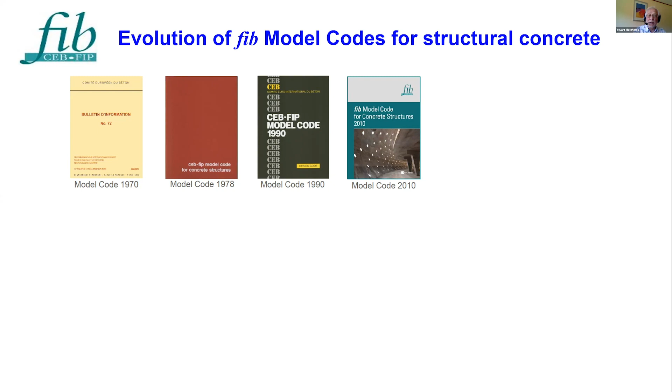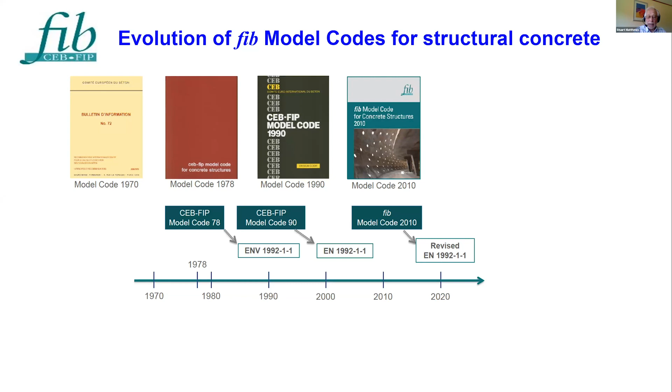Looking backwards, there are 4 previous codes, one from 1970, 78, 1990, and 2010 being the current code. These codes have had an influence upon the development of Eurocode 2 and also upon the development of Asian and African model codes.

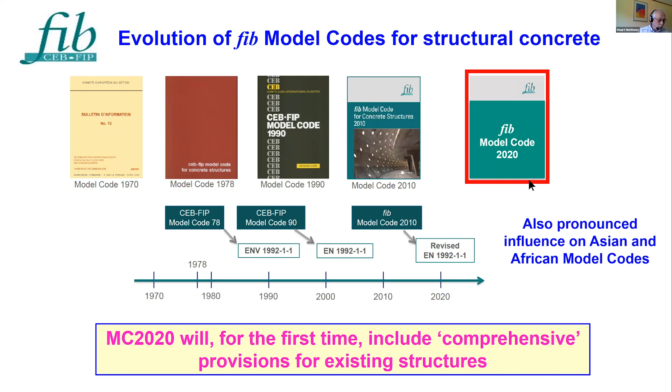But what we're moving on to now is, as you've heard, Model Code 2020, and this will be for the first time including comprehensive provisions for dealing with existing structures.

But before we embark on that, I thought I'd just say a few words about what a model code is. It's a synthesis of international research and industry materials knowledge and expertise. So it's a pre-normative document, but it's an important step in the process of converting such knowledge into practical guidance for the design of new structures and also the life cycle management of existing ones.

So what we're doing is bringing advanced knowledge to industry practitioners and making it available also for national and international code writers. So our goal with Model Code 2020 is to bring together coherent knowledge and experience for both design of new structures and the life cycle management of existing ones.

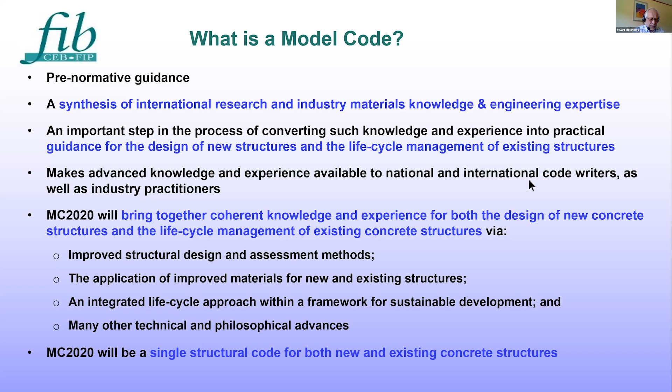This involves improved structural design and assessment methodologies, the application of improved materials for new and existing structures, and we'll talk more about that as we go through, but importantly, adopting an integrated life cycle approach within the framework of sustainable development. But those are just a few headline points.

So I'll give some background on that, but I'll also seek to draw out to illustrate some aspects of the innovations in Model Code 2020. But again, these are quite selective and there are many other things I can't talk about today. This presentation contains many additional hidden slides which I can't show because of time constraints, but will be useful if you wish to review, get more detail on many things that I talk about.

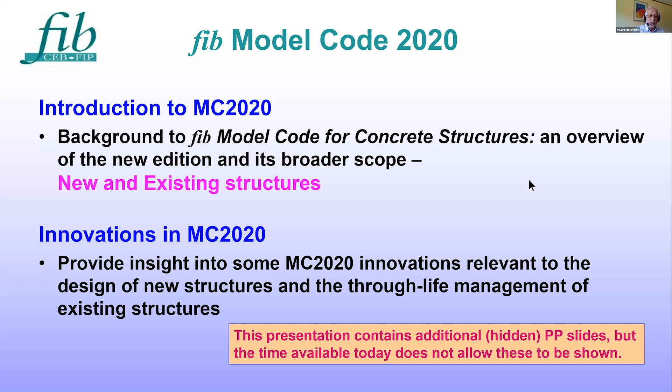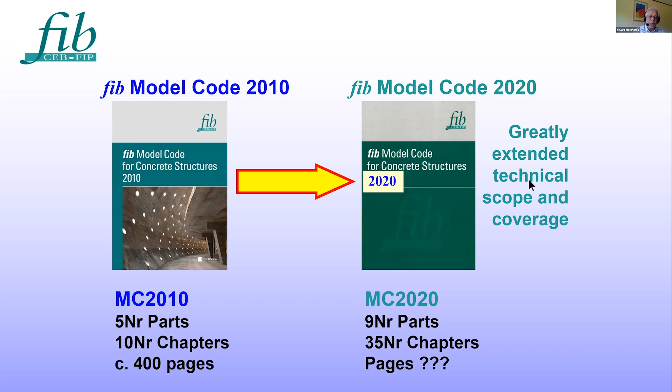So our starting position was Model Code 2010, and we're seeking to move across to 2020. 2010 was in 5 parts, 10 chapters and about 400 pages long. Model Code 2020 is in 9 parts, 35 chapters are envisaged. We don't know the page count at the moment, but it has a greatly extended length because of the vastly increased technical scope from technical developments, but also dealing with both new and existing structures, i.e. the portfolio of concrete structures which exist.

There will be suites of fib bulletins to provide additional supporting information which enables the authors of those areas to go into more technical detail, but also to help us reduce the page count of the main Model Code 2020 document.

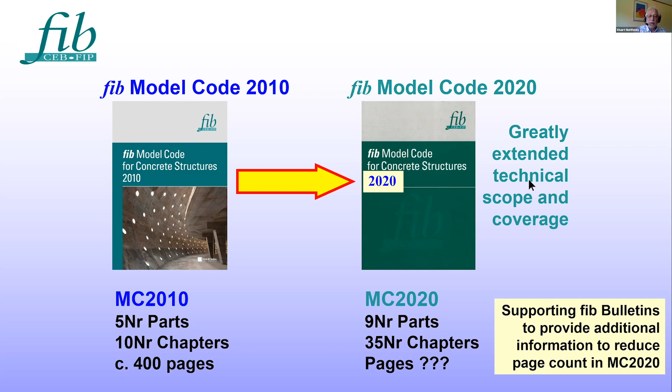An important and significant aspect of the framework is sustainable design. It's becoming an increasingly important issue for us all. Clearly, we're looking to have an ability to design buildings and construct assets with low or perhaps no carbon impact. We're looking for improvements in the efficiency of material usage and structural forms, delivering such advances. We must conserve and reuse existing buildings and extend the useful life of assets where possible. And those activities require an understanding of old materials, existing materials in currently present concrete structures.

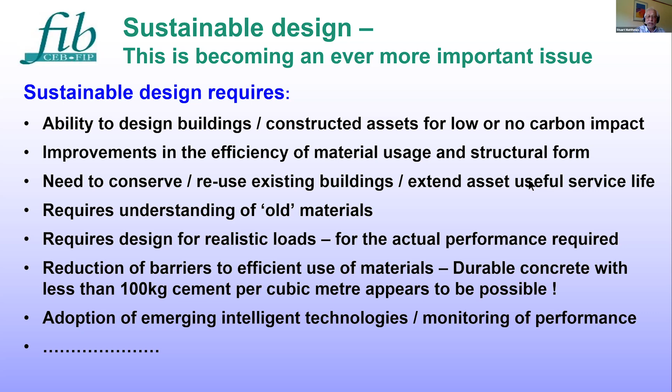We need to design for more realistic loads, so focusing upon the actual performance requirements. And also one of our objectives is to try and reduce barriers to the efficient use of materials. Durable concrete can be made with less than 100 kg of cement per cubic metre. One of our other goals is the adoption of emerging intelligent technologies and getting feedback on the performance of structures through monitoring through life.

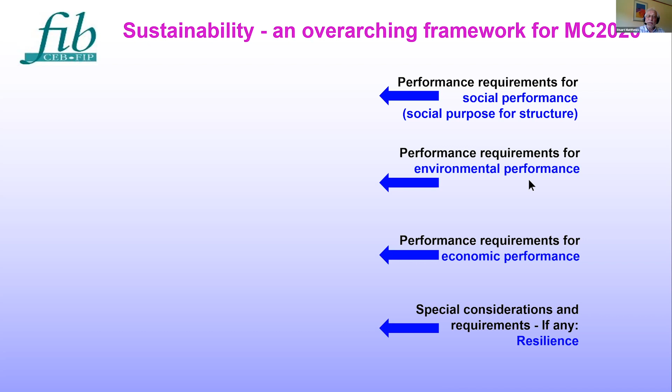Sustainability is an overarching framework within which Model Code 2020 is being built. You've heard a little bit about this from the preceding speaker, but we have the three pillars of sustainability: social, environmental performance, economic performance, but also there may be some special considerations in particular circumstances, such as a greater emphasis upon the resilience of the performance of the structure.

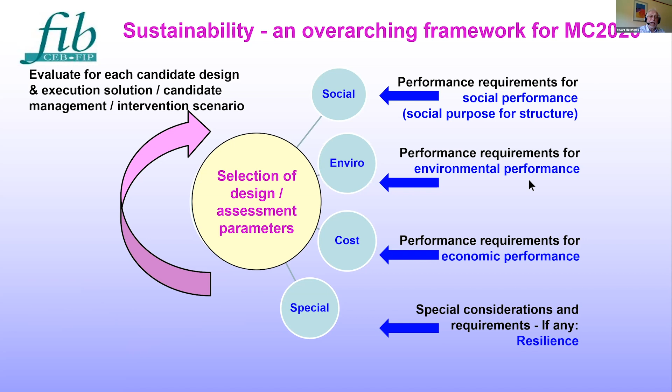So that gives us a series of performance requirements which enable us to select design and assessment parameters which guide our development of candidate design and execution solutions for new build, or candidate management intervention scenarios for existing or adaptive buildings.

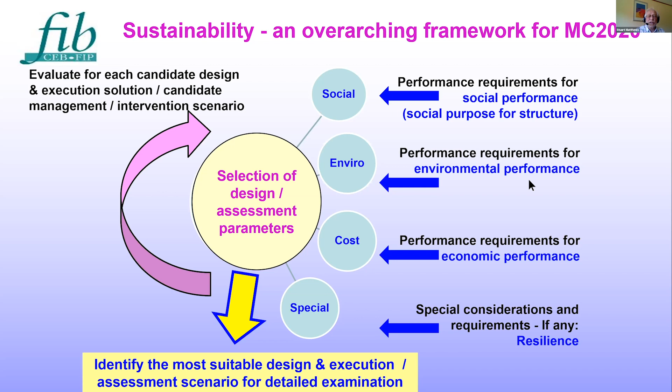That process will help us identify the most suitable scenarios, most suitable options for detailed examination, pretty similar to the way that conceptual design evolves possible alternatives for a design solution.

In terms of conceptual scope for Model Code 2020, we're dealing with new structures, existing structures, but also the interaction between these in terms of adaptation, new structural members as parts of existing structures, retrofitting, and those types of activities.

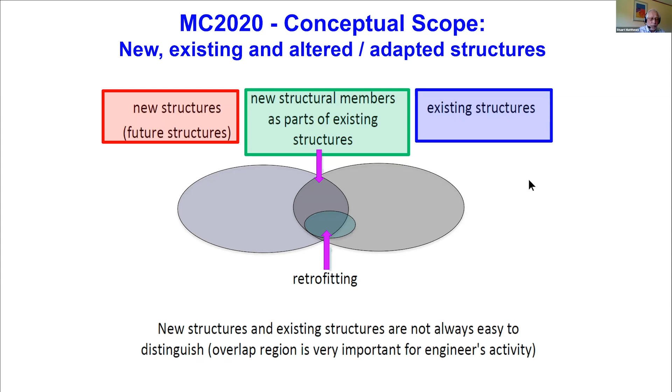I'll just briefly touch upon the table of contents. Today, I'll only itemize the main parts of Model Code 2020. The presentation contains additional slides listing the 35 individual chapter headings, but I don't really have time to go into that today.

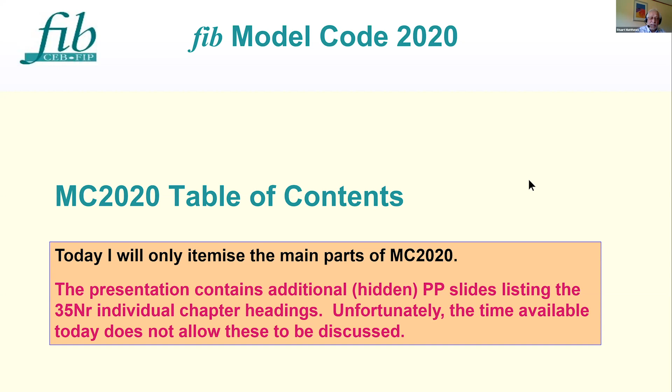A new part, 3, deals with actions on structures, such as probability distributions for probabilistic design and assessment. Parts 4 and 5 deal with input data for materials and interfaces, as the current code does. But of course, as we have more materials, as we're dealing with existing structures and new materials for new construction, we have more materials, and more interfaces between materials to deal with.

The main content of the code is part 6, which deals with design and assessment procedures. That's the essence of the technical content. Part 7 deals with execution, so that's the construction of new structures and interventions and adaptations upon existing structures.

Part 8 is dealing with through life management, which in the current code comes under the title of conservation. And part 9 deals with dismantlement and reuse. So that reflects the requirements of the circular economy, which we are gradually moving to over time.

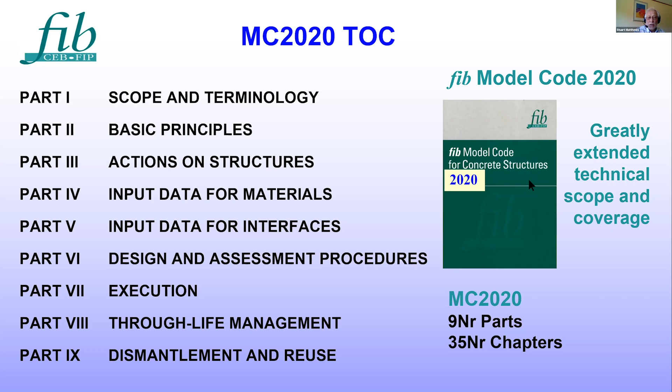In terms of the development of Model Code 2020, we've been working on this since 2016, and we're now in a position where we hope by the end of 2020 to have all the author drafts for the various sections which have been defined. We have some finished contributions already.

Once we have all the author drafts available, we will go through a process of harmonizing those to produce a coherent whole, a coherent document. And we hope that that might be done by mid-2021 and perhaps in time for the FIB symposium in Lisbon.

Obviously, this is an extremely challenging timescale for the magnitude of the task which is underway. And like everybody else, we've had impact from the COVID virus situation.

Let me just touch upon some aspects of concrete materials. We've learnt over the years lessons from old structures, contemporary and recent structures, as well as from material studies.

In Task Group 10.1, we've defined a whole series of action groups to complement the FIB commissions, which deal with areas of overlap or areas that FIB doesn't particularly cover in a coherent manner. So Action Group 13 deals with concrete models. That was formed last year.

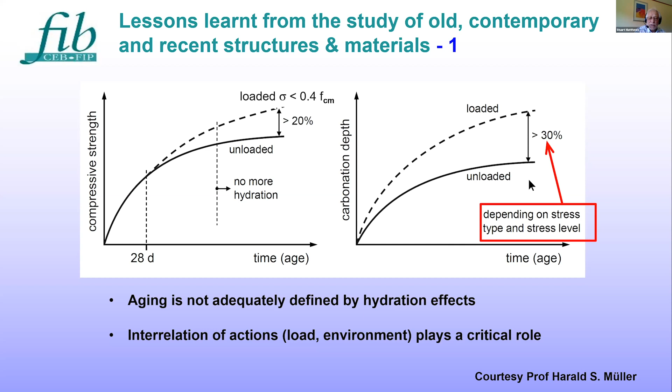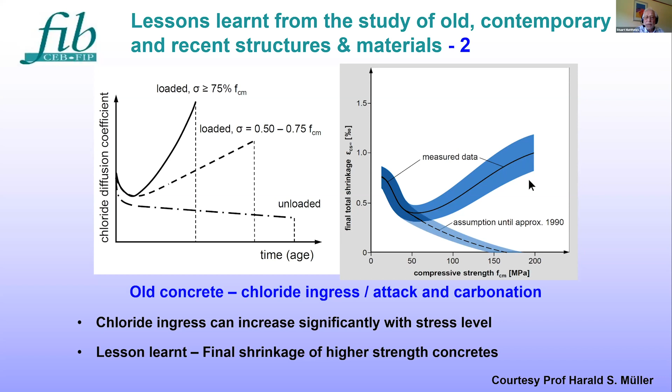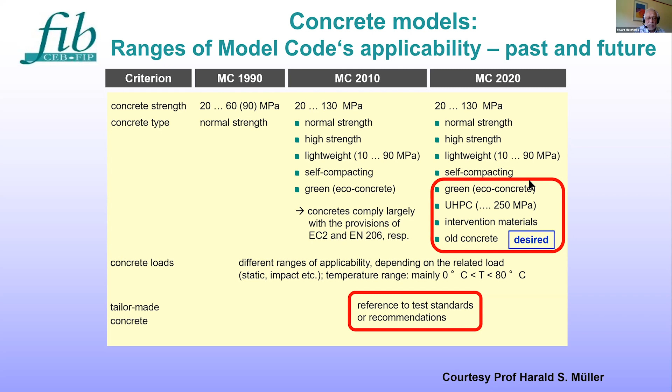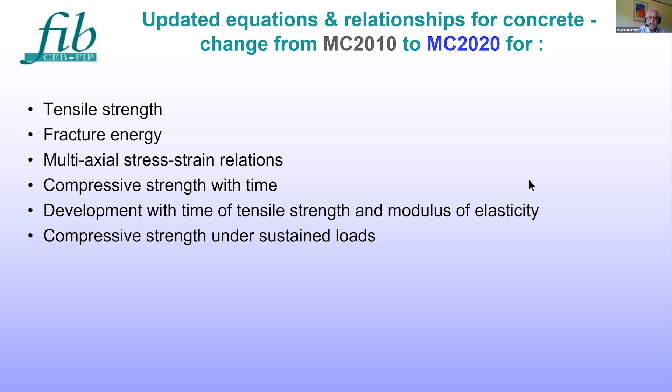There's been a significant update of the equations and relationships for concrete between 2010 and what we're envisaging will be included in Model Code 2020, and the factors are listed here: tensile strength, fracture energy, multi-axial stress-strain relations, compressive strength with time, development of tensile strength and modulus of elasticity with time, the behaviour of concrete compressive strength under sustained loads, influence of shrinkage and creep, and particularly at high stress levels, concrete at elevated temperatures, fatigue behaviour and impact behaviour.

So these relationships which were presented in Model Code 2010 are evolving. I again don't have time to show all of these, but I'll show one example in a second.

We maintain concrete classification, so compressive strength and density as in Model Code 2010, but we're envisaging introducing a classification on durability based upon resistance classes, based upon test results.

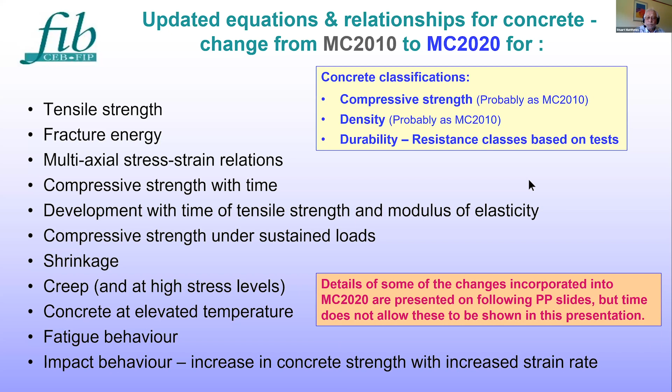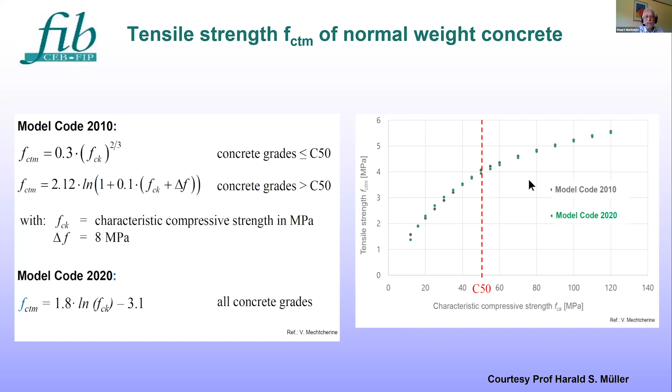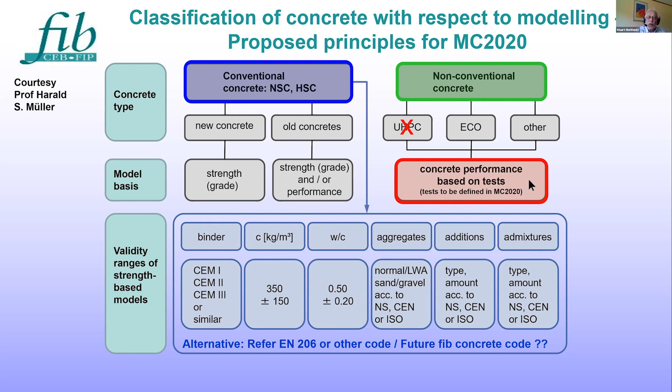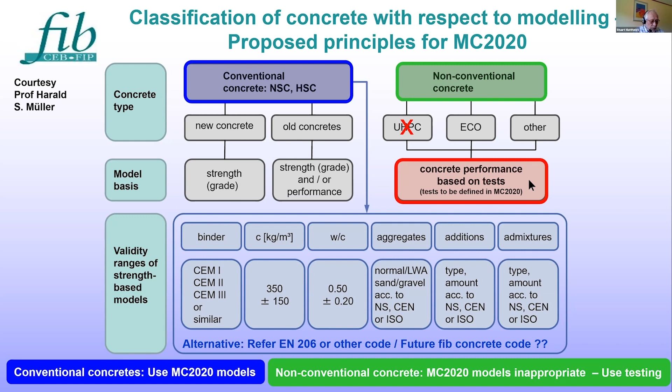As I mentioned, non-conventional concretes, eco-concretes, ultra-high performance concretes, and so on, and existing old concretes, will need to be largely based upon performance tests, which will have to be defined in Model Code 2020. So summarising, conventional concretes, such as the relationships I talked about previously with that big long list you see in Model Code 2010, but revised for Model Code 2020, are applicable to what we're going to term conventional concretes. For non-conventional concretes, i.e. the green box, we will use a lot more testing, because those conventional models will not be appropriate for those materials.

So let me just move on to improved materials and mechanical models. One of the things we're looking to do is to have better models for assessing the actual capacity of a structure.

Model Code 2010 and 2020 were seeking to adopt performance-based design. So we need to assess the ability of the structure to fulfill the performance requirements for the design service life at a required probability level.

Obviously we use limit state concepts, but on the graph here on the right hand side, the vertical axis is resistance and load effects, and on the horizontal axis that's time. You can see the blue line is the resistance curve, shown deteriorating with time, and the red line is the load effect increasing with time. That might be physical load, but it might also be environmental load. As those two curves increasingly overlap with time, you end up with a basis for establishing service life.

However, if we seek to take into account other resistance effects which are not typically taken into account for design, such as compressive membrane action, which will give a larger structural resistance, we can use that as a basis for evaluating an extended service life for an existing structure.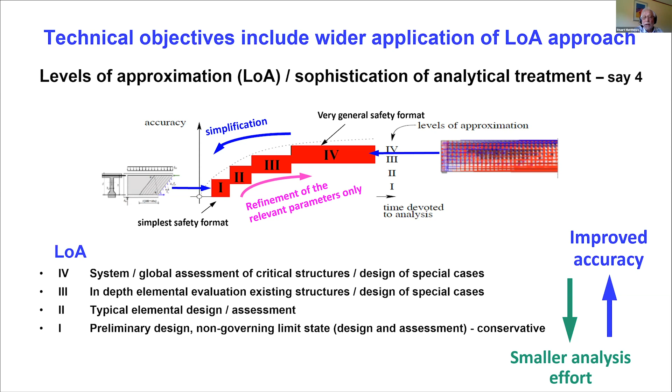The lowest one is the simplest safety format, which might use hand calculations or spreadsheet models, and the most sophisticated is probably going to be a non-linear finite element analysis based, or possibly linked to other evaluations. So you see improved accuracy with higher levels of approximation, but for lower levels of approximation, you're expecting a smaller analysis effort to be required.

So I'll just seek to give an illustration of that and how we might consider load carrying behaviours not normally considered in design to justify a higher load capacity in existing concrete structures. Here we're using compressive membrane action and levels of approximation.

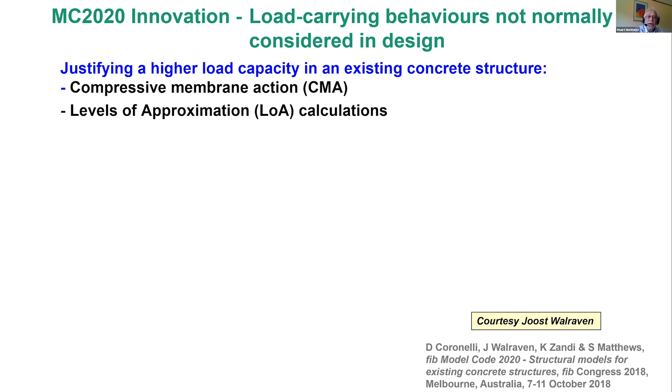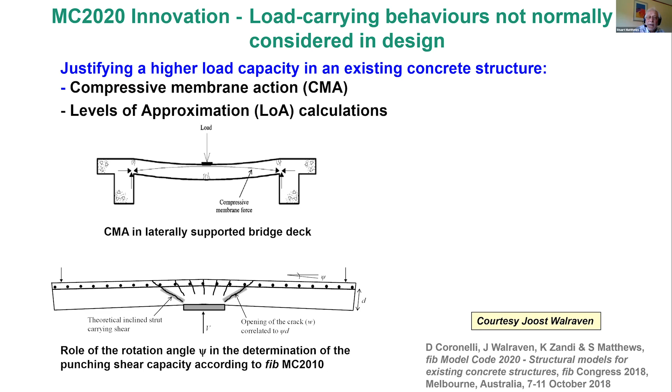This picture shows a slab through a concrete section through a concrete bridge deck, where the slab is mobilizing a compressive arch action, and we can represent the punching shear capacity by using the rotation developed over the supports there, and this enables a relationship to be established between rotation and punching shear load.

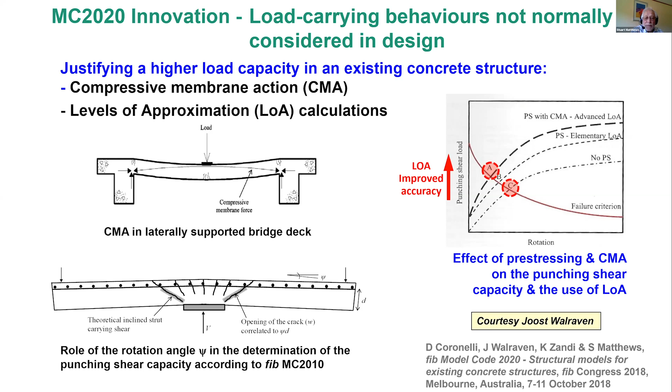So here you can see that there are different forms of analysis: no PS (no pre-stress), and at the top we've got pre-stress with compressive membrane action, using an advanced levels of approximation methodology. So the higher load capacity has been justified by the improved accuracy of an advanced level of approximation method. There's a paper reference in the bottom right hand corner which describes this in more detail.

In terms of existing structures, one of the things that we are needing to take into account is the deterioration processes and how to model those to understand the impact upon the structural performance of the structure.

We've divided these into initiation and propagation models for concrete as a material, which may suffer from physical deterioration and damage processes, and might be affected by chemical deterioration or biological deterioration processes. There's still much debate on how far we can get in Model Code 2020 with these forms of deterioration and our representation of them in the code.

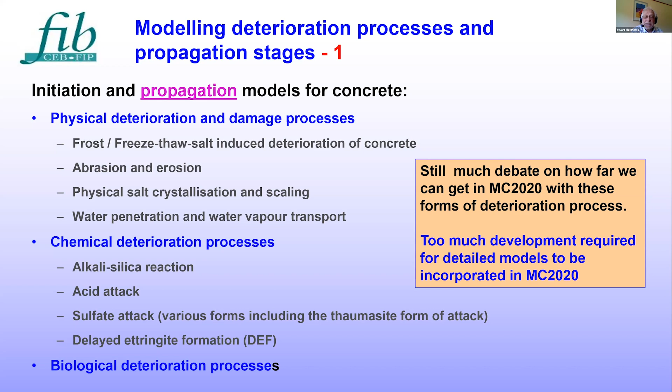We recognize that there's probably too much development required for detailed models on many of these topics for them to be incorporated in Model Code 2020.

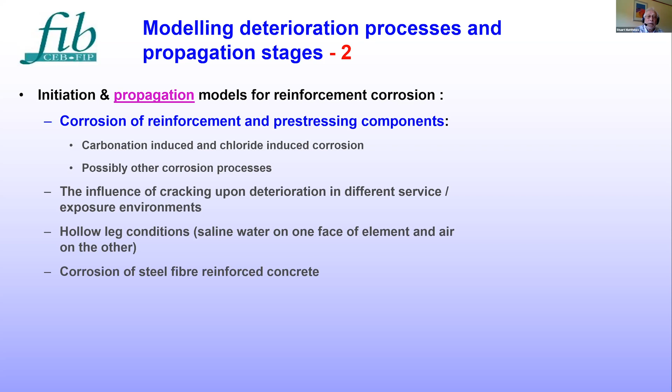If we turn attention to initiation propagation models for reinforcement corrosion, i.e. by carbonation-induced or chloride-induced corrosion, but possibly there are other corrosion mechanisms that we would need to take account of.

Seeking to take this forward, last year there was a workshop in Paris on mathematical models for reinforcement corrosion. It led to quite strong debate on various aspects of how the modelling could be used, and we're still working on that, and we need to see how far we're going to get.

In terms of future aspirations, one of the things we'd like to be able to do is evaluate the implications of cracking upon durability more effectively. But also, in the longer term, there must be the aspiration to undertake a durability assessment, a residual service life evaluation, after interventions have been made.

So there's a long way further to go with many of these aspects, which will be treated in later updates of the code.

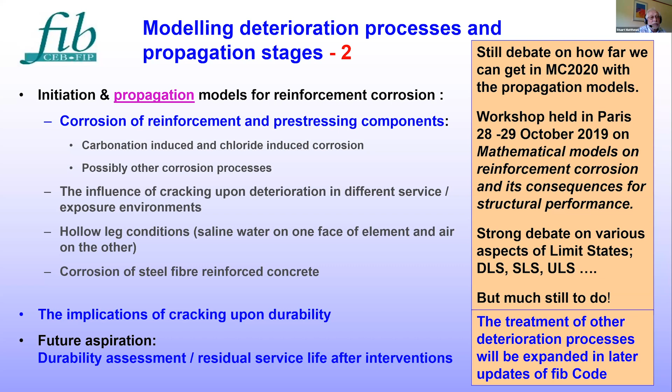Let me mention a case history that illustrates the role of monitoring and the value of information in the management of an existing structure. The objectives of these areas of activity are to improve the quality and safety of constructed assets, potentially extend their useful life, and provide diagnostics and risk assessment for existing structures. The eventual goal is monitoring safety in real time.

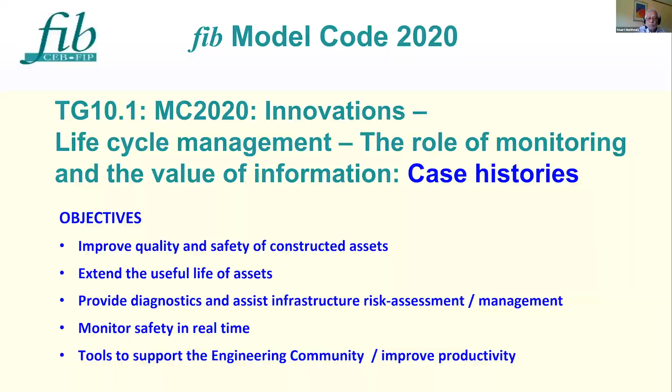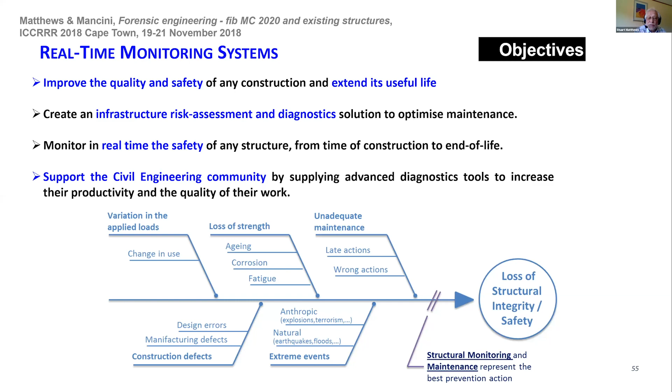This shows some of the factors influencing the behavior of a structure: variation in applied loads, loss of strength due to various factors, perhaps inadequate maintenance, but also design errors, manufacturing defects, or construction defects. There are adverse or positive impacts from anthropic interventions, and natural events such as earthquakes and floods, which may lead to low-probability, high-consequence extreme events, whereby you need to evaluate whether the structure has lost structural integrity and whether it's safe to remain in continued service.

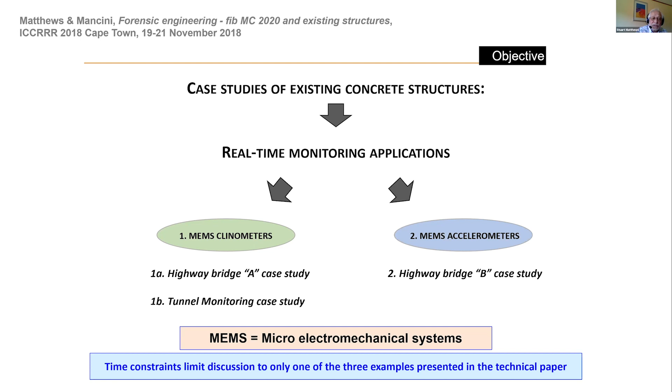So in terms of an example, this deals with real-time monitoring. This comes from a paper shown at the top, which describes the use of MEMS clinometers and MEMS accelerometers. MEMS is a micro electromechanical system. Today I'm going to talk briefly about the tunnel monitoring case study.

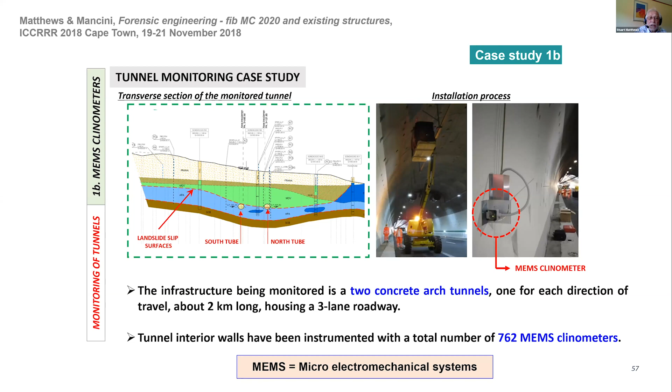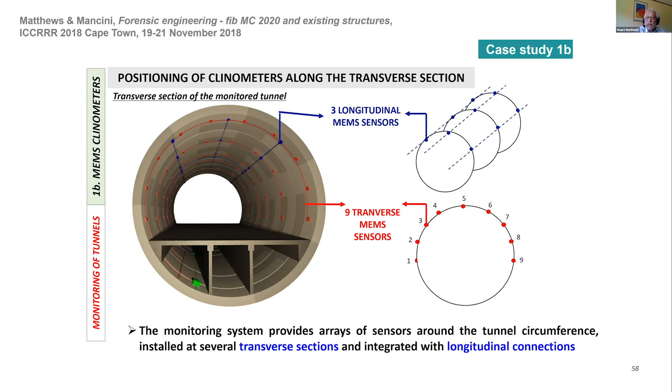Two large tunnels were built, about 2 kilometers long, each housing a 3-lane motorway, but they had to be positioned through an unstable area of ground with the potential for landslip. The interiors of the tunnel walls were instrumented by 762 MEMS clinometers - I'll show you the layout. There were sensors picking up longitudinal movements and sensors picking up changes in the transverse section at 9 locations.

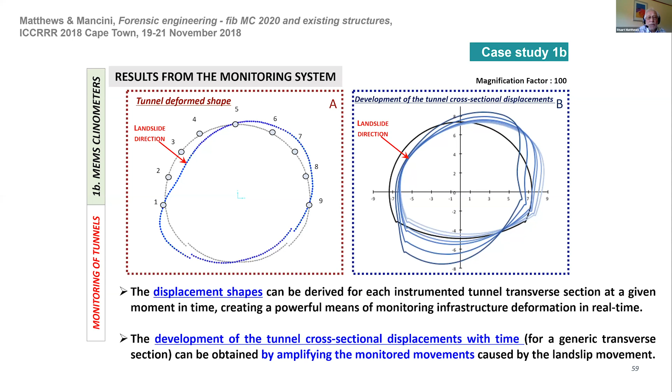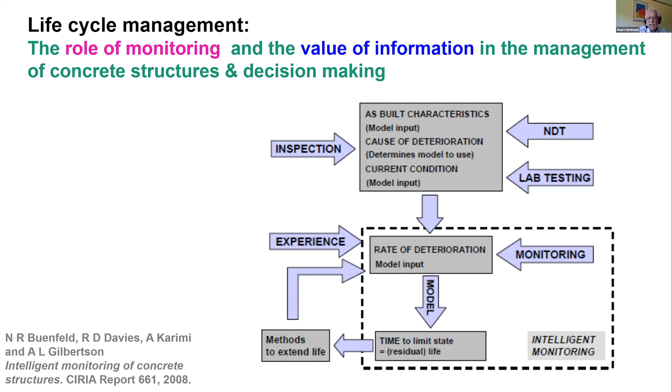That information feeds back into life cycle management through a system which will probably also bring in information from NDT inspections, lab testing, and the like, to enable an assessment of the existing safety of a structure, but also to make a prognosis about future circumstances.

Finally, I'd like to touch upon how Model Code 2020 will be dealing with interventions upon structures. There's a supporting paper highlighted here with thoughts on this, which have been developed somewhat since that paper was written. We're relating back to other guidance where possible - here we're using the ISO 16311 suite of documents on maintenance and repair of concrete structures.

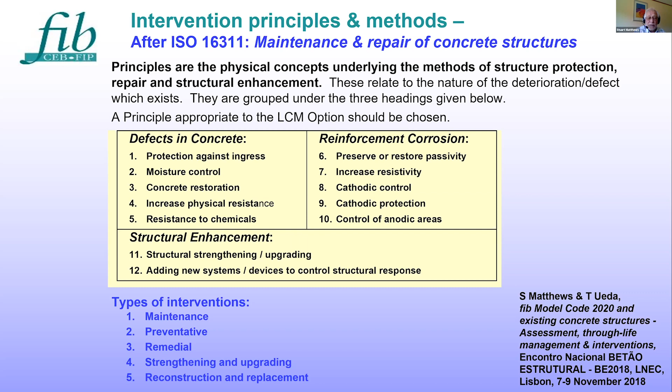So we're approaching identification of problems in terms of defects in concrete, reinforcement, corrosion, and also where structural enhancement is required, and coming up with principles for interventions or management associated with these. We're looking at using this approach for 5 types of interventions: maintenance, preventative interventions, remedial - i.e. improving the current condition of the structure - strengthening and upgrading, and reconstruction or replacement.

So to conclude the presentation, I'd like to say that Model Code 2020 has a lot of innovations relevant to the design of new structures and the through-life management of existing ones. We have a strong focus on sustainable design and life cycle management. Some specifics of the innovations are grouped for new structures, adapting existing structures, and the management of existing structures.

So if you look at new structures, there's the ability to use new materials, new concretes. We're advancing models for durability and service life design, considering structural behaviours not normally considered in design, as I illustrated in the talk. New information on dealing with actions on structures, fibre concrete, monitoring, global structural behaviour and modelling, as well as life cycle management.

In terms of existing structures, in addition to the above, we're looking at procedures for assessment, dealing with conservation requirements, clearly monitoring and life cycle management, but also performing remedial, upgrading and preventative nature interventions. So I'll leave it there.

One of the questions is from Vyacheslav Javakowski to Professor Matthews: What about the type of cement for durable concrete with cement content less than 100 kilos per cubic meter?

A lot of that comes from particle packing, but it's certainly been demonstrated by various colleagues in FIB and in universities that you can achieve this. I think Jos Walraven demonstrated an effective concrete mix with only 70 kgs of cement, but many of these developments have been achieved by optimizing the particle packing arrangements rather than using the cement as a filler.

But of course, one of the points being made is that there are restrictions in the current codes which prevent you reducing your cement content below maybe 300 kgs, because that's deemed to be the minimum allowable. So we're hoping we can move slowly in a positive direction to allow new developments and processes to be taken up by industry, supported by academic work in the future.